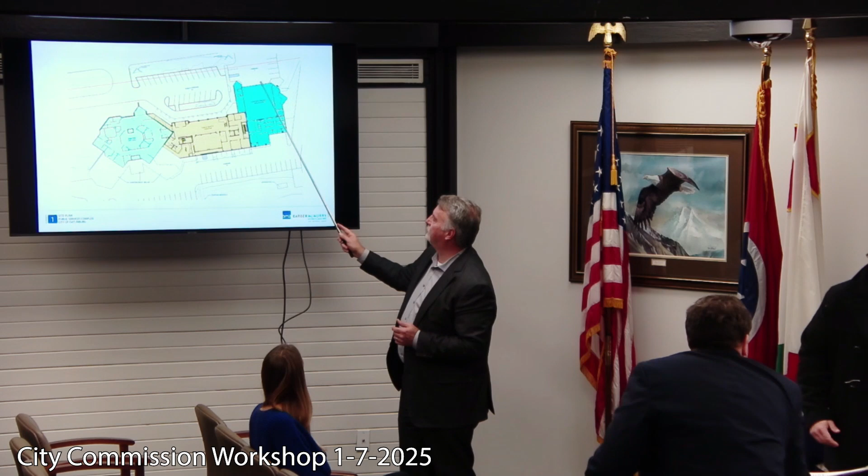So quickly in the site plan, we still have the same main entry coming in off of the highway, but we're going to switch the way that the traffic works here. We're going to bring cars in, so when you pull in, you can allow people to get out of the passenger side so you can drop people off, come around and switch the parking in front, main entry here, new construction in yellow, essentially a fully renovated fire department and a new connection and renovations to this part of City Hall.

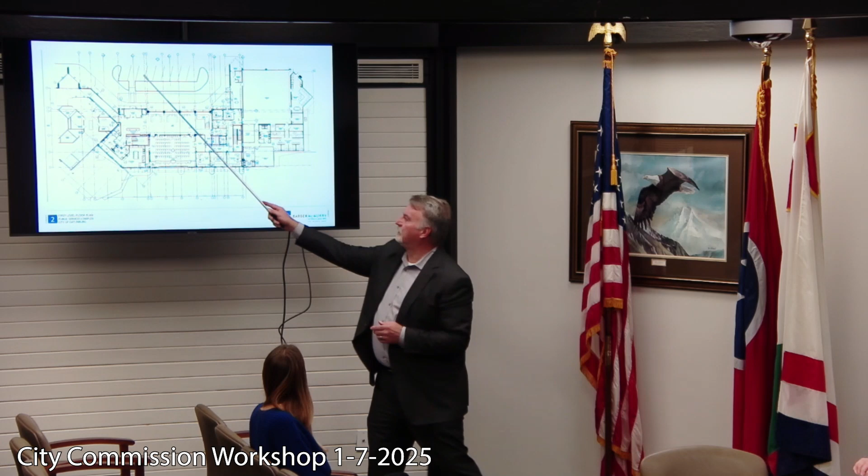I'm going to show you the main level plan first. I mentioned one new entry. You come in, there's a reception area here with connection to City Hall. We can make this a new conference space. You can leave it as a secondary entry. We think you may want to secure the facility and have everybody come in, but it still leaves you some options. But you come in, right, left, you're waiting for the courts or commission.

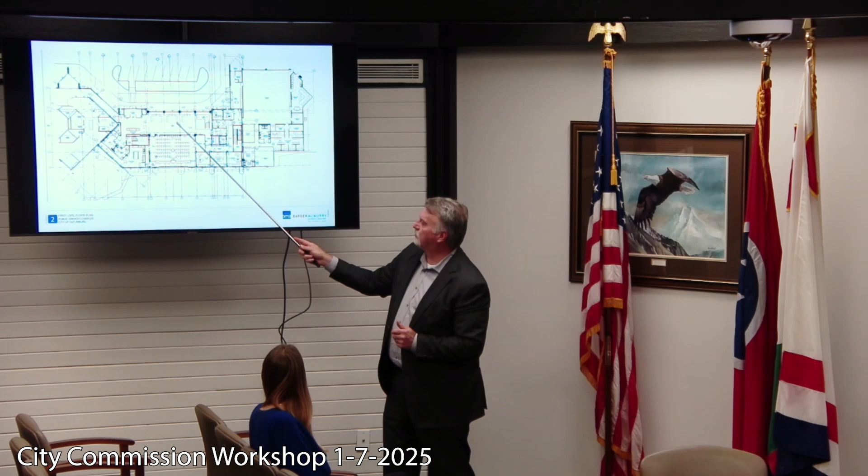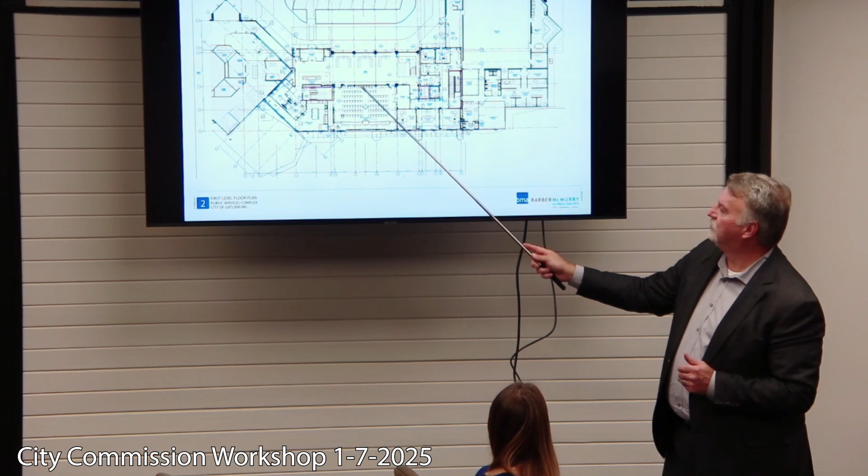With courts and commission happening here, a drastically expanded seating capacity with a large information wall with audio-visual along here, audio-visual wall here, audio-visual wall here, storage, so that when you're switching out tables and chairs, working things out there, and then a nice raised area similar to this for plenty of people.

There's handicap accessibility to that raised area, and you can bring food in, you can cater it. Entry to the fire department is right here with their offices.

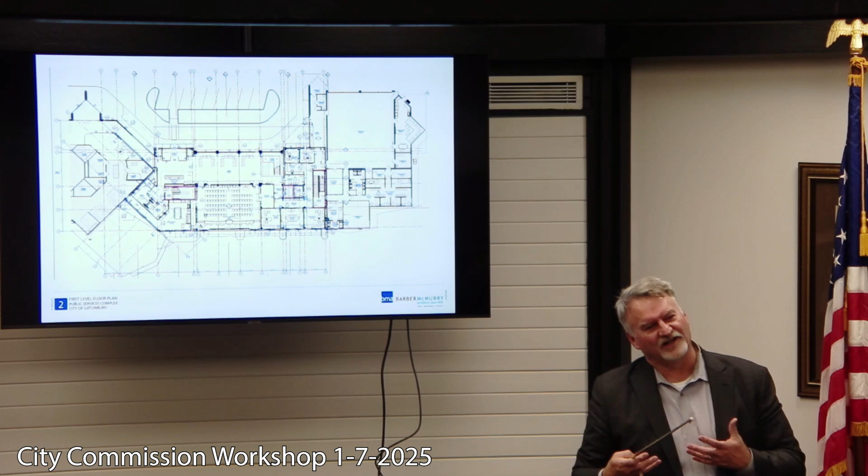Here, cleaning up the truck bay, getting all of the stuff that's lining the walls out of the way. In an emergency situation, it's tough for them getting in and out with all of their equipment. So now their gear comes to here with lockers. There's other equipment storage here. We're moving the laundry and all of the stuff that's in the middle of that bay out, cleaning things up, having a more formalized men's sleeping quarters and a formalized women's sleeping quarters.

We still have their training area. So this is the main level of things. There's an elevator core with stairs here, and public toilets in that area.

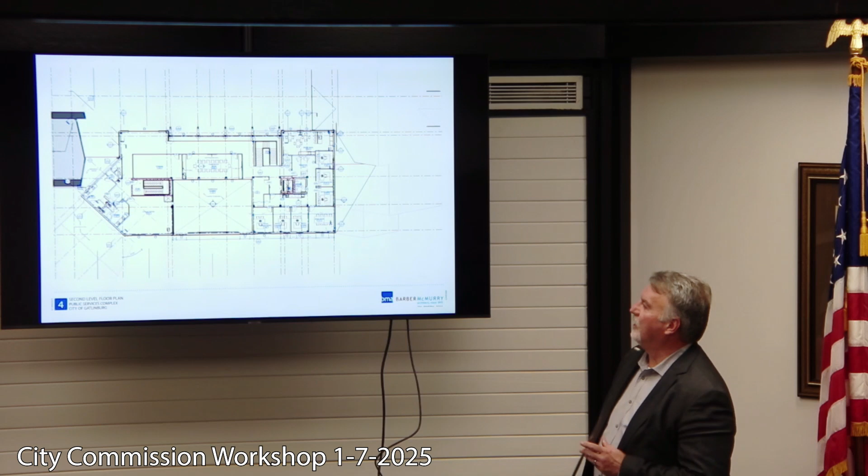Going all the way up to the upper level then, it's kind of an open area, so you'll be able to see here there is a grand monumental stair at the end to tie this level. There is office and plans review space here. This is open to the large commission chamber emergency operations area with a conference space here.

In an emergency situation, you've got all of your information walls going and highlighted. People can break out, come up here, meet, and still see what's going on down in the chambers below. Expansion space here, restrooms, toilet, storage, expansion space, and you've got a little storage and expansion space there.

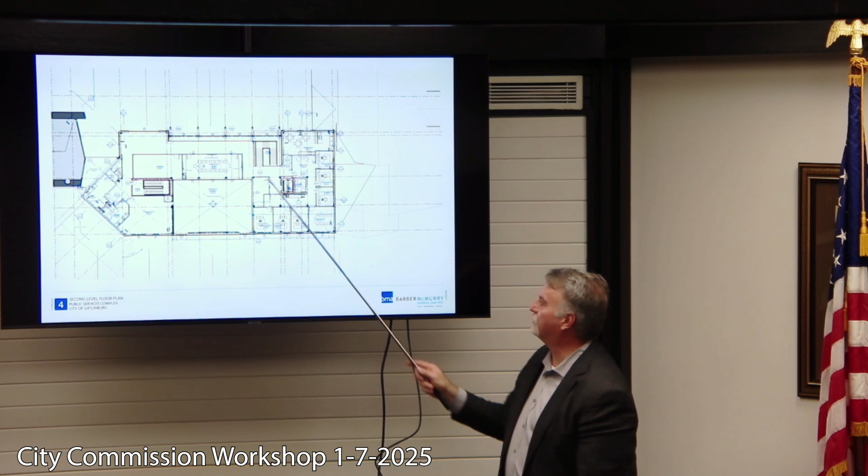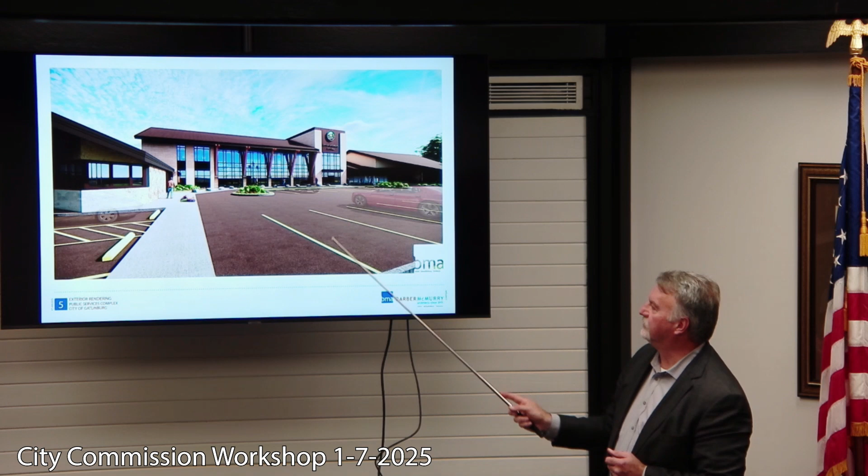Then the overall facility is beginning to tie in. Stone that matches this is along the front of the facility, heavy timbers to begin to tie it into some of the newer facilities, some of your trolley stops, what you're doing at Rocky Top Sports World, and then a main identifiable entry to bring you into the facility there.

I know that's a quick, sort of a 1,000-foot overview. Any questions, comments?

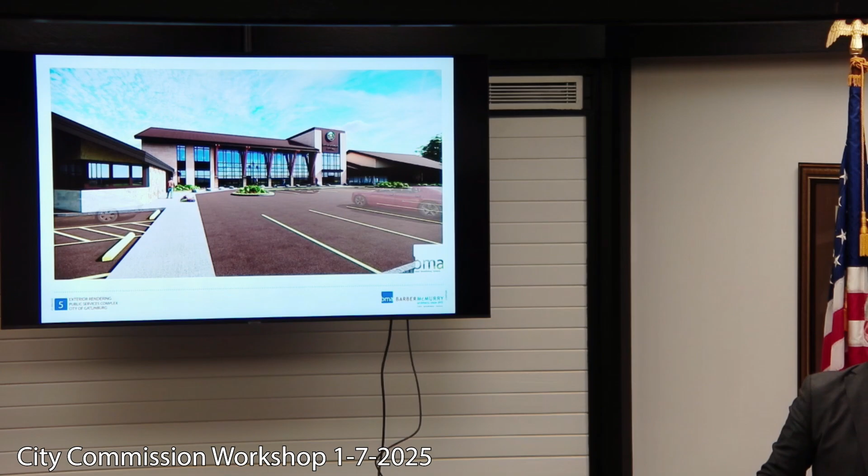I'm just glad you designed it with the room to grow, because a lot of times stuff is designed just for that moment. I think it's very good. Well, this is a big investment. It's tough. It's not something that the city of Gatlinburg's gone into lightly. You haven't done something like this in a long time. And you really don't need to be at 100% capacity when you move in. You need a little room to grow. You probably got 4 or 5 offices that you can expand into, not counting this space when you reassign it later and decide what you want to do as you kind of see the function and flow of the way things are working. Do you need more conference space? Do you need more office space? I think it leaves you lots of options for your future.

Any other questions, comments? Thank you, Kelly. Thank you.